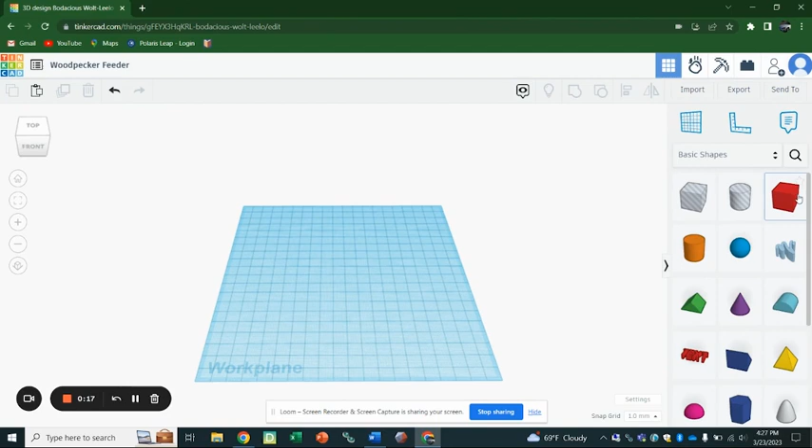But the first thing we're going to do is we're going to start by dragging out a box here. So if you look on the right-hand side, we're going to drag out a box, and we're going to click the corner here, and this is going to allow us to change the dimensions of our box. And the dimensions that we're going to go for in this one are going to be 40, 125, and 120. So we're going to click.

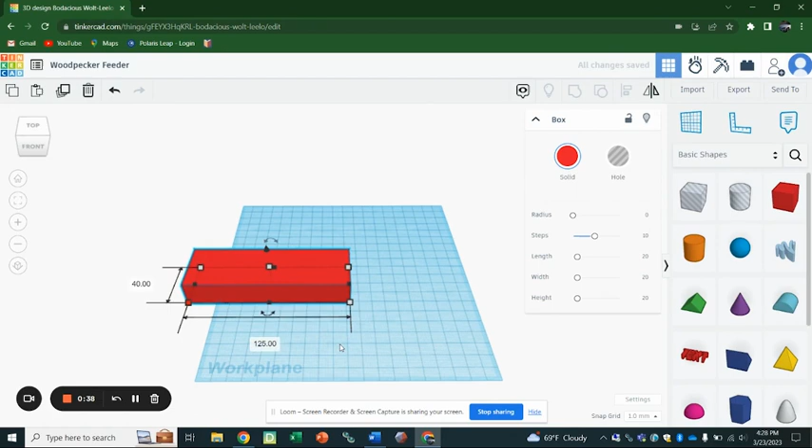We're going to type 40, and it's going to be 125. Then this middle one here is the z-axis, and that's going to allow us to type 120 in. And what this does is it's going to give us the body of our suet feeder.

I want you to click on this box, and then you can either press Control-C and Control-V, or in the top left-hand corner, there is a button that says Copy, and then a button next to it says Paste. And what this does is it creates a clone of that image.

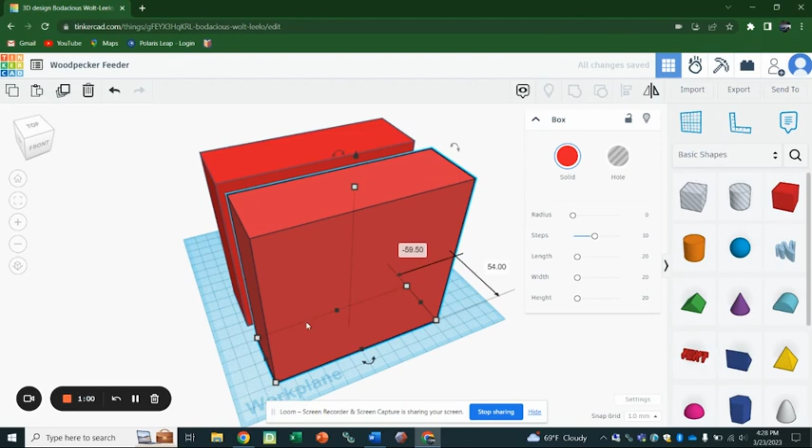The next thing we're going to do, though, is we need to make a cavity so that our suet can fit into it. So if we left-click the new object that we've made, we can left-click here in the corner, and we're going to change this one to 35, and our other one is going to be 120. We're not going to change our height because we want it to be cut all the way through.

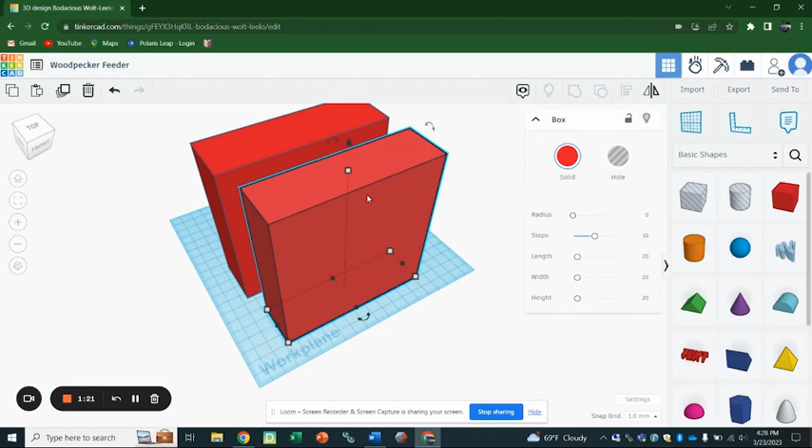So the smaller one that we've created now, where we changed the size on it, left-click that, and then click Hole. Then I want you to highlight and drag to make a box with your left mouse button. And then on the top right-hand corner, there's a button called Alignment. So you can either press L on your keyboard or click this button that says Align.

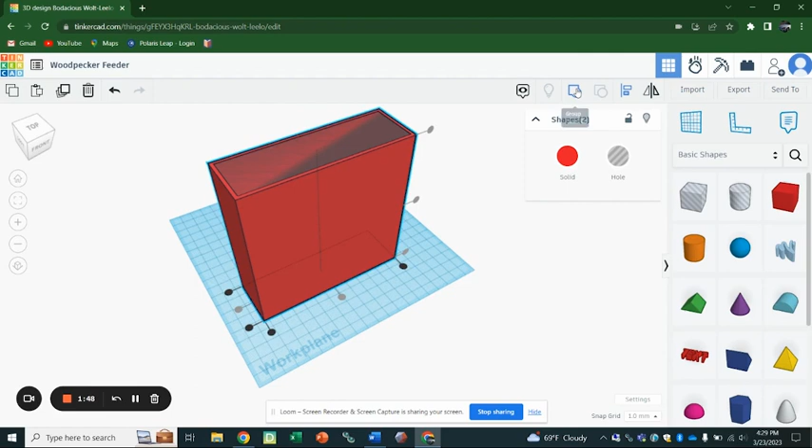And we need to align it in two ways. We need to do the X and the Y axis. And then you're going to press the button that says Group or Control plus G. And what that does is it creates a cavity. And this is what our suet is going to sit in. So good job. Take a moment to do that.

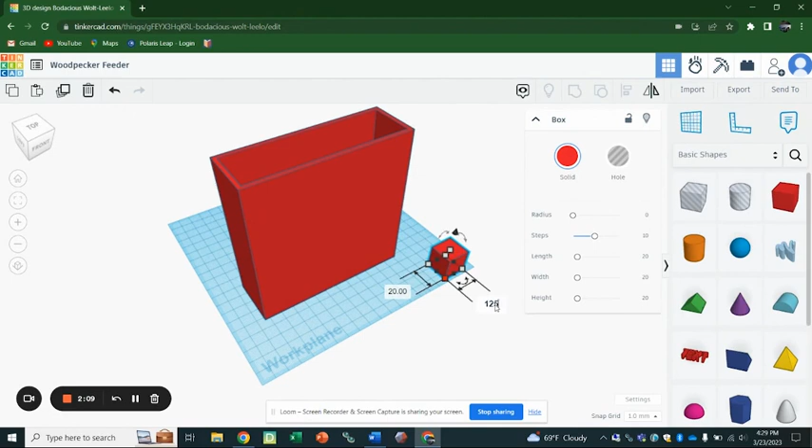And after you've completed that, I want you to drag in another box here. And the dimensions of this box are going to be 125 by 80 by 5. So we're going to click this and type in 125 by 80. And then our height is going to be 5. Drag this over, and this is going to be kind of the base where the birds can sit on this or hold on to this.

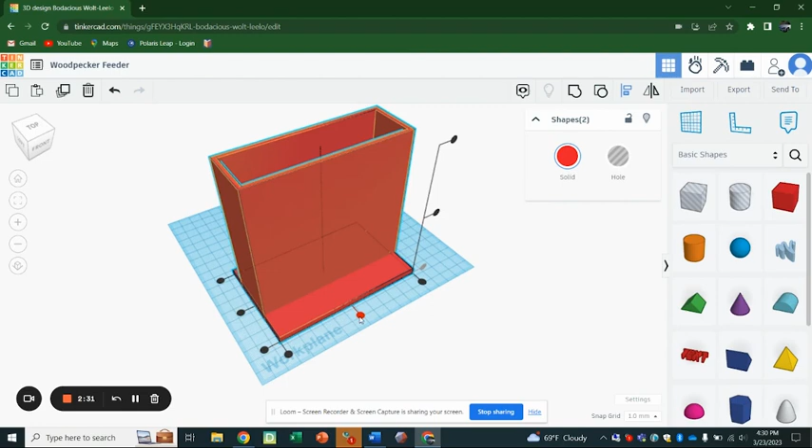I want you to highlight this part here, highlight it all, and I want you to press the L or Align button. We're going to do an alignment here, and here, and what this does is it aligns it perfectly in the center. And then I want you to press the Group button after that. Perfect.

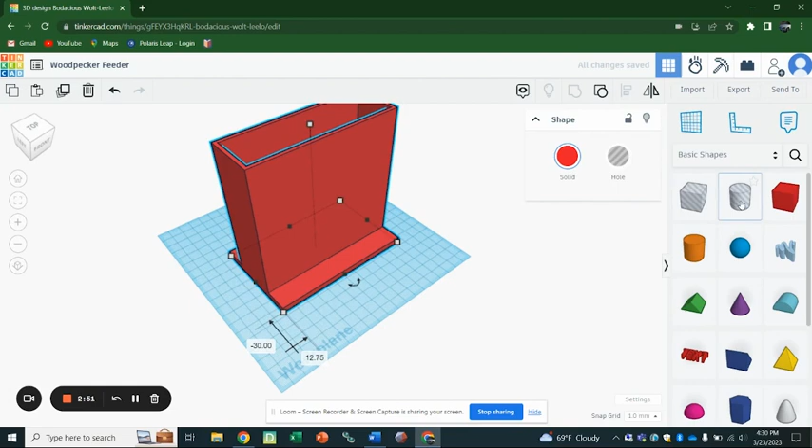Okay, the next part can be a little tricky, but it's not too hard. So watch it first, and then you might have to pause and repeat to see this part. But what we're going to do is we're going to drag in this cylinder that's right here. Now I'm going to zoom in so you can see this, but if you look here, there's two different arrows that look like they're back to back with a circle on top.

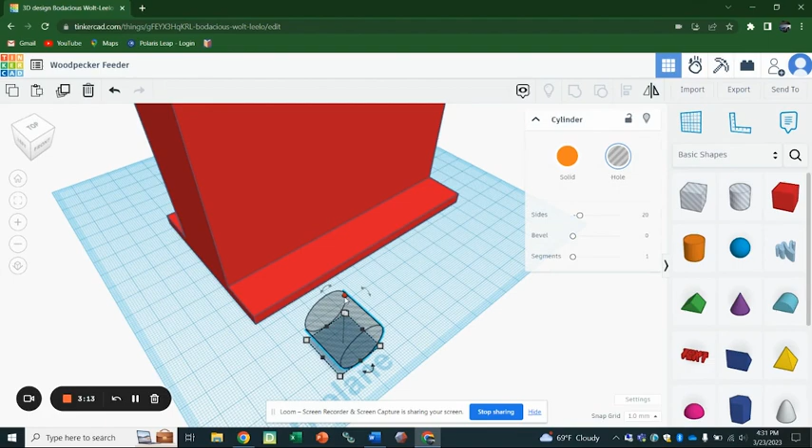Click that, and this is going to allow us to rotate. And we need to do a 90-degree rotate on this. Perfect. Now I want you to click on the new cylinder, and you see this little cone that's here. This is what allows us to raise it. We're going to go up to 10. Perfect. Now this is something that I sometimes do because the view that we're using right now is a three-dimensional view.

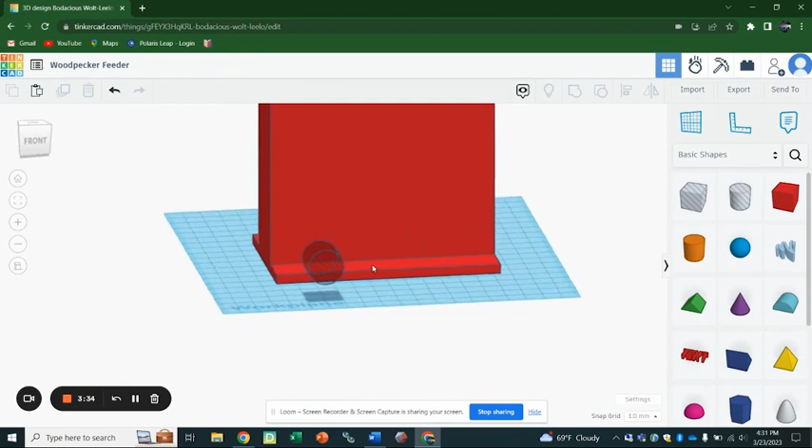And there's a button here called orthographic view, and then we can click this. What it does is it's going to kind of warp our vision a little bit, but it will allow us to look at things in a completely flat sense so that we can make sure of exactly what we're looking at. So if we click here to look at the front, we can see an absolutely flat perspective of our woodpecker feeder.

I'll show you the difference. So this right here is normal view, and this is orthographic view. And the nice thing about orthographics is it allows you to line things up more precisely because you're not looking at something three-dimensionally. So perfect.

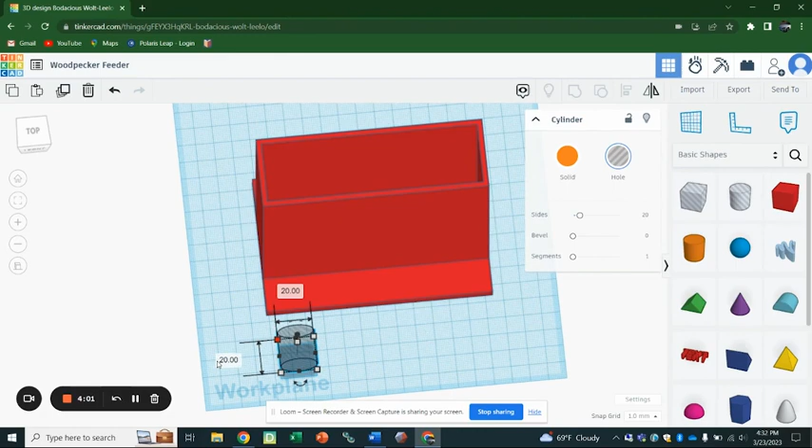So what we're going to do next is we have this rotated here, but we need to drag it out more. So we're going to click here on the side, and we're going to just extend this out. I'm going to extend it out to 100 or so. Rotate just to make sure that you're piercing through. So we'll come over a little more. There we go. And these are going to be the holes that are actually going to be on our woodpecker feeder.

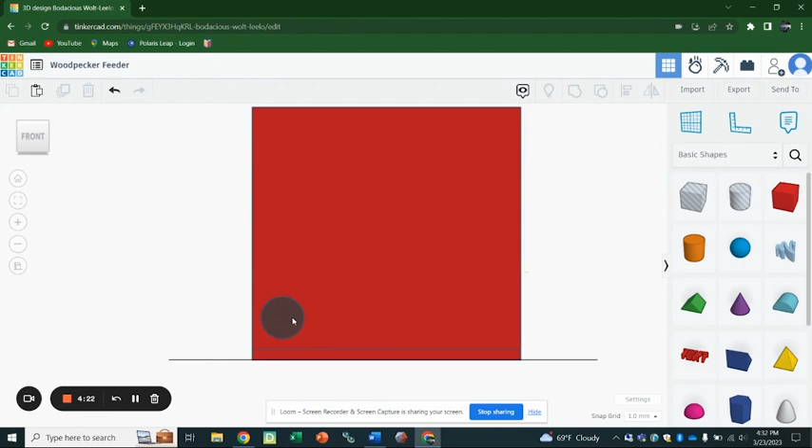So if we click here in the front again, we're going to learn how to do something called duplicate and repeat. So I want you to click on just the hole here that we're going to put in. There's a button here at the top that says duplicate and repeat, or you can press Control and D. Press it one time only. Now I'm going to click on this again one time. Now there's actually two holes right now. They're stacked on top of each other.

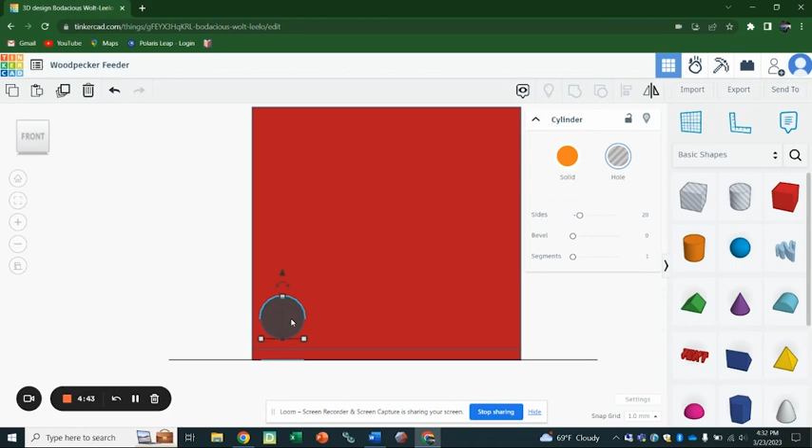So I've clicked on just the top hole by left clicking on it. And then I'm going to press right on my arrow key here, and I'm going to move it over just a tiny bit like that. Perfect. And I'm going to press this button again. Now if you press duplicate and repeat, it will repeat those holes for you, just like that.

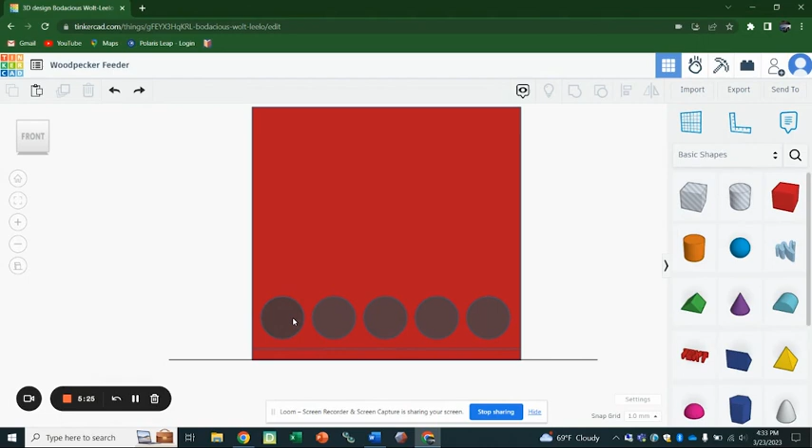So here's kind of the awesome part. Instead of doing this for the entire length of this block here, we can hold down Shift on our keyboard and left click each one of these, and press the button that says duplicate and repeat. Now it looks like it did nothing, but just like the previous one, it's actually stacked on top of itself. So we can bring this entire row up with this arrow right here, the raise arrow. Perfect. And then we can press it two more times.

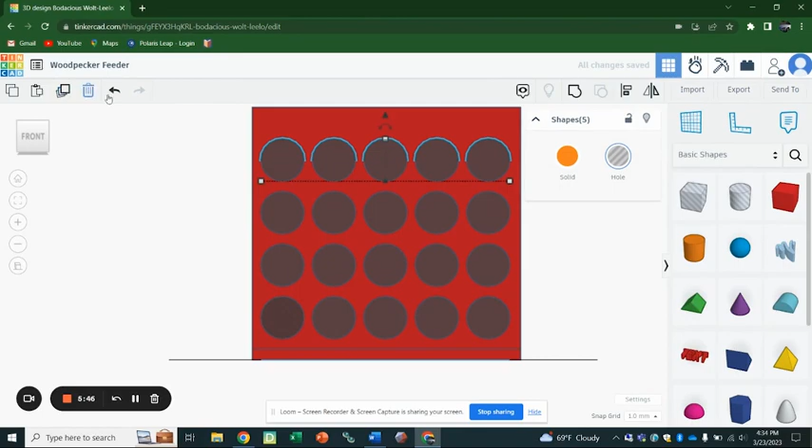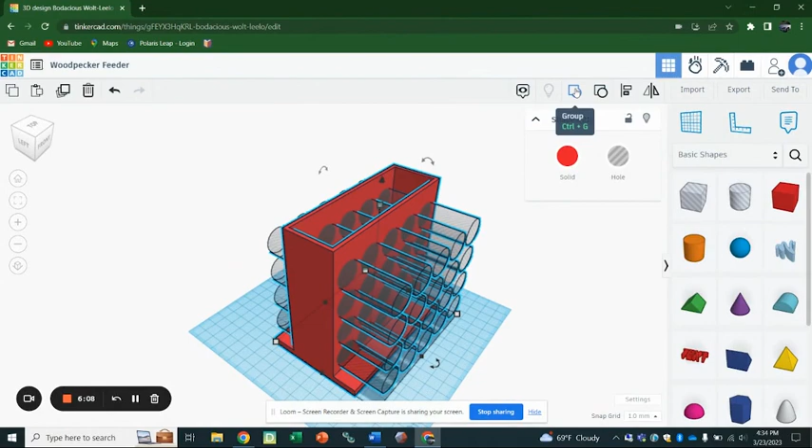And if we look at it again, we have all of these different holes that have been created now. So I'm going to click this button here that's going to take me back to the 3D view, so we can see it a little bit easier and see what we're working with. We're going to highlight everything, or you can press Control and A, and then press Group, which is in the right-hand corner here. Awesome. And this creates all of the holes that are in there.

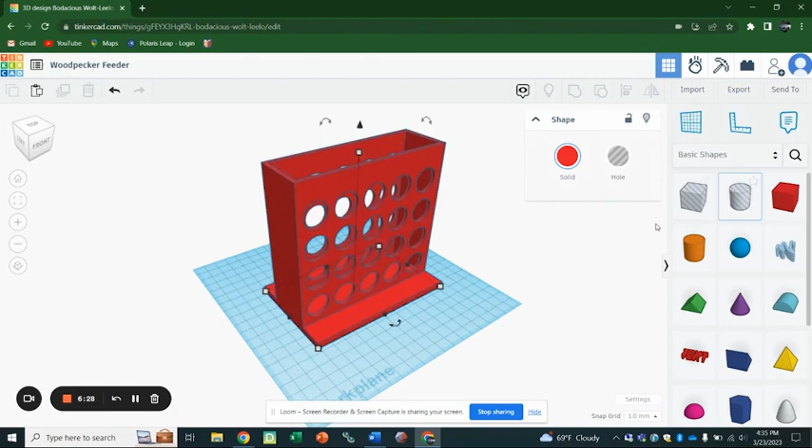Okay, only a couple more steps. These holes are where the birds will be able to stick their beaks in and get the suet out. But we have to have a way to hang this. So we're going to draw another cylinder. Drag the cylinder down here. And just like before, you're going to click that little arrow that allows you to rotate and type in 90 for 90 degrees.

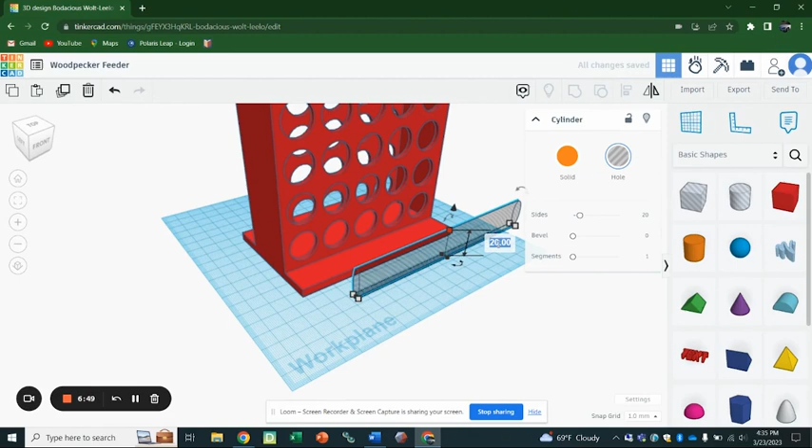And we're going to change this one here. It's going to be 150 long. So 150. And our other dimensions are going to be 5 millimeters, 5 millimeters. This is going to be a way that we can eventually hang this. So we're going to raise this up here to about there. I'm going to rotate it to get some perspective to see where we're at.

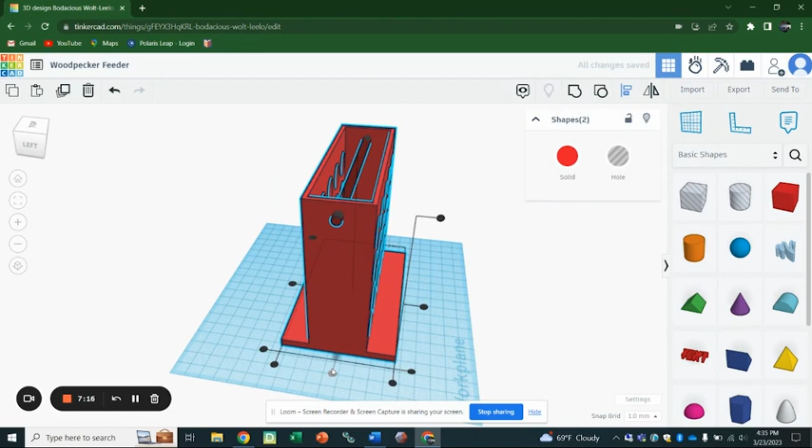There we go. And that's good right there. So what we're going to do is we're going to make sure that we're perfectly aligned in the middle. So we're going to highlight everything we have here. Press L, or the alignment button. And I want you to click this button here. And what that does is it's going to align you perfectly in the middle of our woodpecker feeder.

Then you're going to highlight everything and press the Group button. What this does is it allows us to have holes that are punched out, and this is where we can use something like twine or a metal wire to eventually loop through and then to hang our suet.

Okay, this last step is completely optional, but it's kind of cool to put a nice little graphic or touch onto this. We're going to import something that I found in Google Images called an SVG file, which is basically like a silhouette. So if you go to Google Images, you can search for something like Woodpecker SVG. And then if it's an SVG file, you can actually import those into Tinkercad, which is cool. So let me show you what I mean by that.

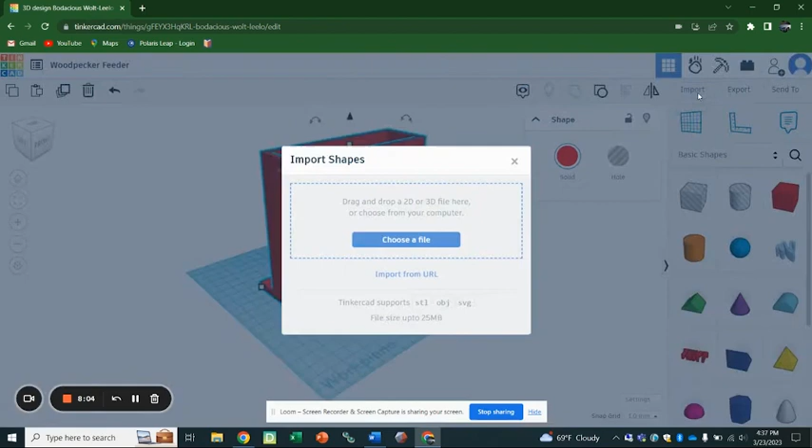So if you click on Import up here, I'm going to hit Choose a File, and I'm going to import my Woodpecker SVG. This one is a very large one. You can see it's 585 millimeters in dimension, which is way too big. That's way bigger than our entire feeder. So I'm going to scale this down. I'm going to guess 10% scale, but we'll see what it looks like when it comes in.

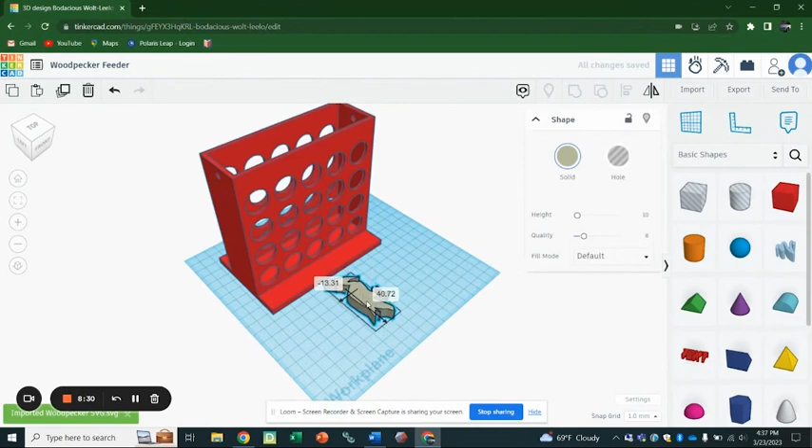And it's importing it now. And looks like it's hidden under here, so we're going to move this out. And look at that, there is our little woodpecker there. So this is a little too thick because we want this to be on the sides of here. So we're going to just take this down to like 3. Perfect. And we're going to rotate him here 90 degrees. And then we need him to be facing up, so we're going to rotate him again 90 degrees on this axis. Perfect. So let's drag him kind of into place and see if we can get him to work.

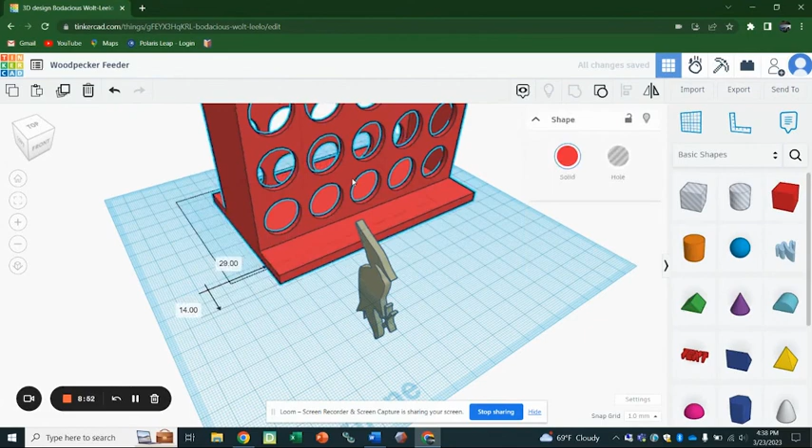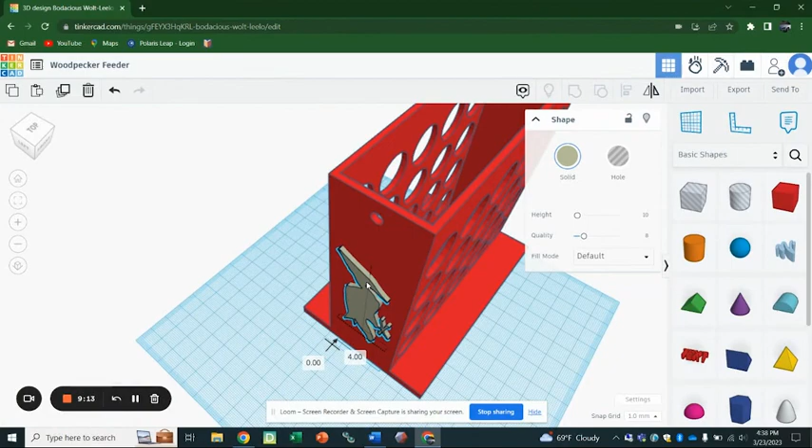So up we come. We'll look at it sideways. There we go. That looks pretty cool there, but we want it on both sides. So make sure that you're touching through. You can see before I wasn't touching through right here. You can see through it. We don't want that. We want to make sure that we're actually touching through. So there's that. Perfect. So we are touching.

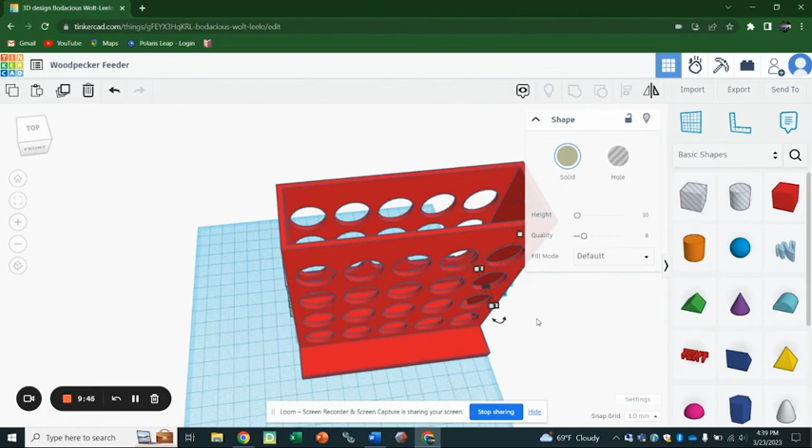What we can do is we can press copy and then paste. Or if you wanted to, you could left click it and then press your duplicate button, which puts it right on top of it. What I'm going to do is I'm going to move him sideways like this so I can look at it. And I'm going to left click just the pileated woodpecker. This is going to move him across with the arrow key. We're going to see what we have here. Just make sure that he's touching through.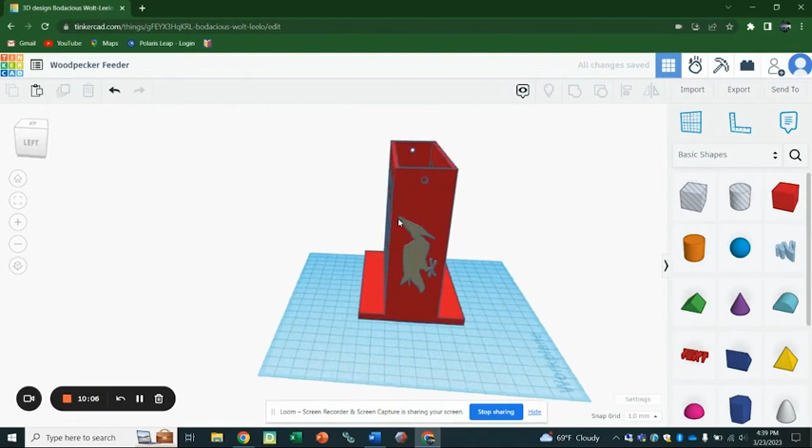Perfect. If you were really concerned that these were not lined up completely, you can highlight everything, including both woodpeckers on both sides and the middle part. Press the L or align button, and then we can do a center alignment. And what that will do is align both sides. You'll know that you're lined up perfectly. So you can go ahead and press Control A or highlight all, and then press Control G or group. And what this does is it's created a woodpecker feeder for you to now have 3D printed.

If you're ready to 3D print this, you can press export and then press STL format, and it will then download the STL format for you. And then you can put this on a flash drive and bring it into the library to be 3D printed.